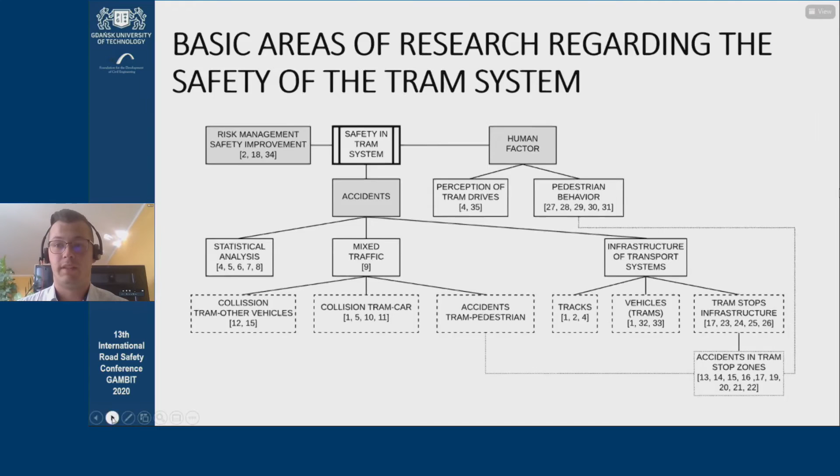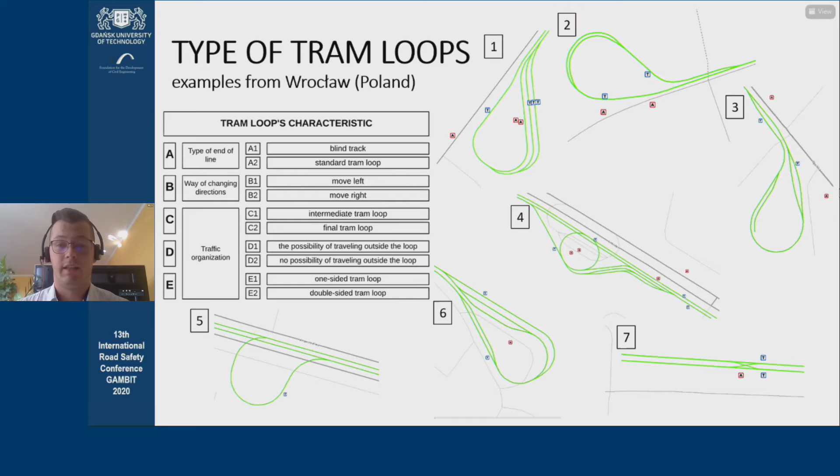The joint operation is possible on loop number 4. And the last division is, this is again about indirect loops. It's possible to access them from one side, like loop number 5, or they can be accessed from both sides. That's loop 4.

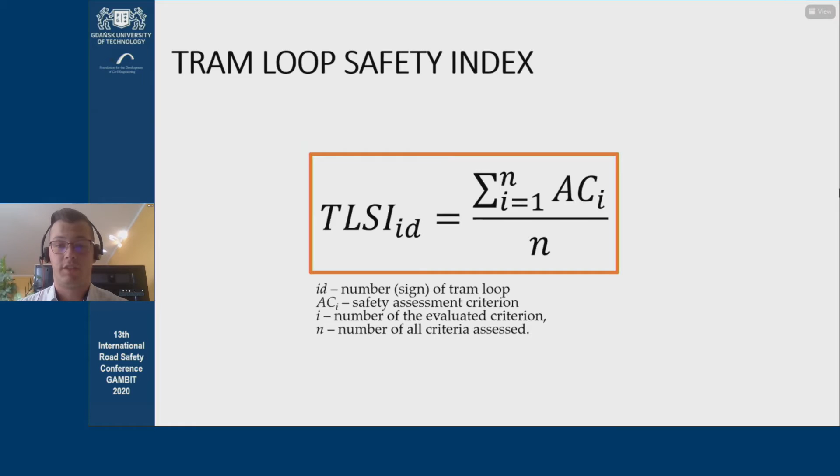Further, I'd like to talk about the safety ratio which we've developed. We call it TLSI. It's Tram Loop Safety Index. And this consists of the assessment of the various criteria, and there are 5 of them. I'll give the criteria in greater detail a little later. The ratio is actually the arithmetic mean of the 5 criteria. And here they are.

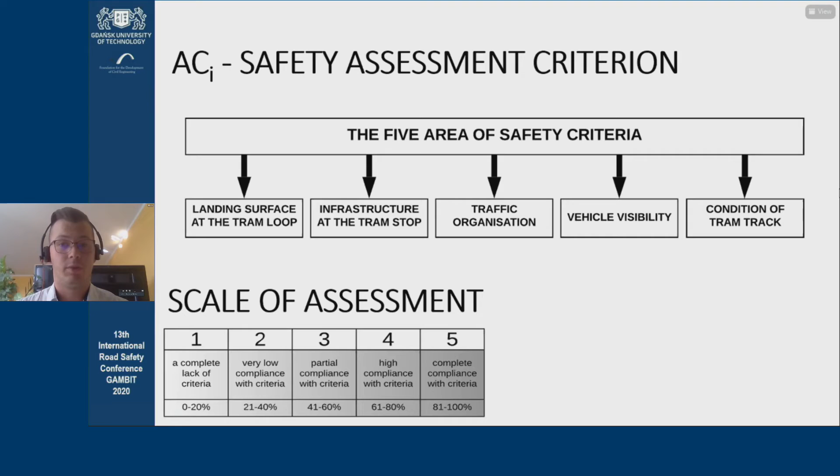Then the value is translated into a point value. Based on the point value, we can calculate the TLSI indicator, the safety index. And for an index calculated in that way, we are then able to give priorities and recommendations for a given loop. Thanks to those recommendations, given certain priorities for the necessary safety measures, we can, at the end of the day, improve the level of safety of the users of the given loop.

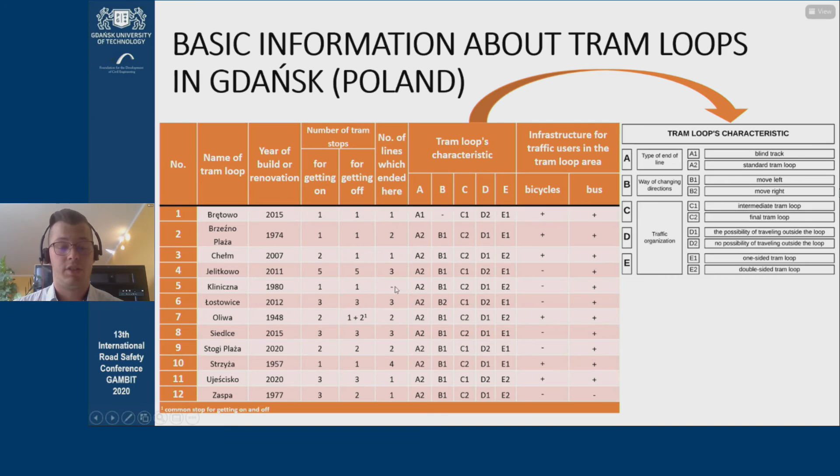and basic information about the loop's characteristics on the basis of the individual division and the relation of the loop to the tram line, and also the ability to provide service in the area of the loop to either bus transport or to connect to bicycle infrastructure.

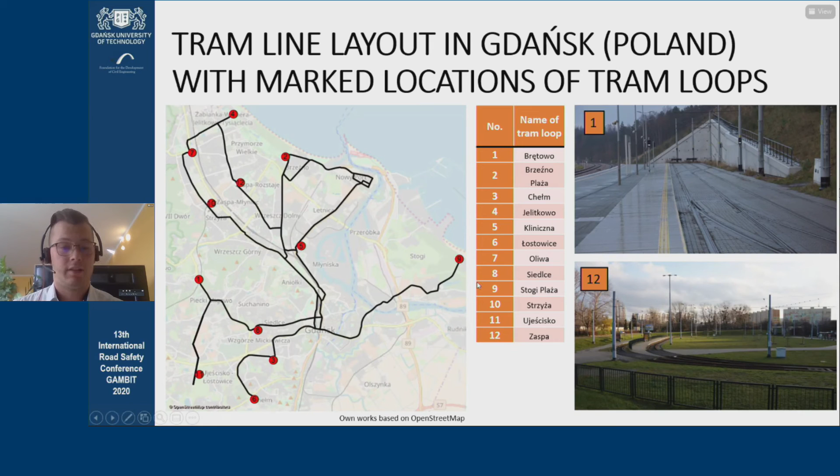This is actually the end track where trams end their route, but they can turn back switching tracks. And number 12 is Zaspa loop, where trams turn around in the traditional way.

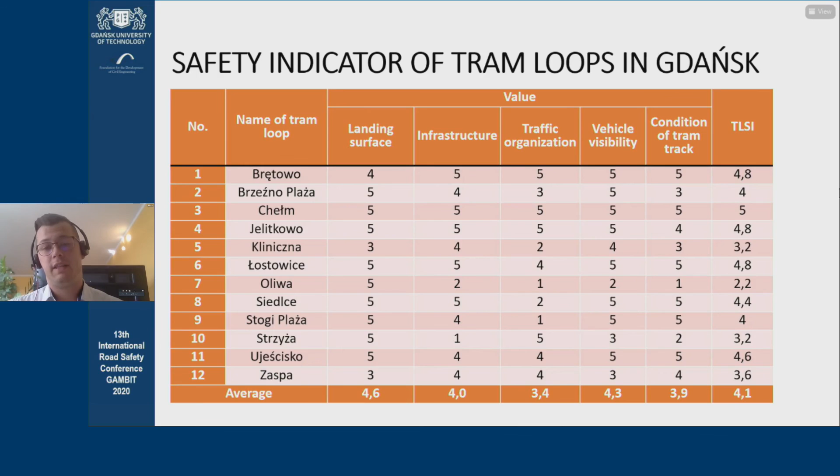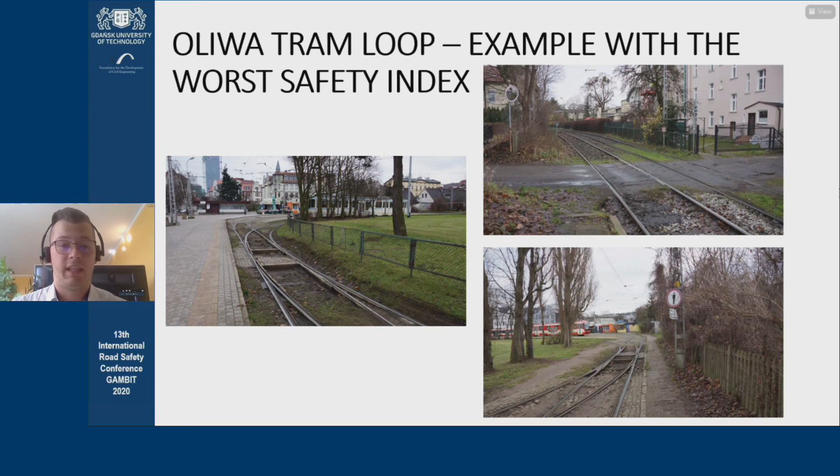Partially there is no fencing. There are different levels of the platforms, and there's insufficient lighting, something that was talked about so widely during this conference. In terms of visibility, there's also an area where we could indicate elements of infrastructure and greenery that pose an obstacle to visibility. Also, we could note the low technical condition of the track.

Moving on to the conclusions. As I said in the beginning, the literature overview indicates that there is a research gap in terms of tram loops. The proposed method for assessing the safety of tram loops provides the possibility to carry out a multi-criteria analysis that could be used for reporting, monitoring, but also to make recommendations about which elements need to be improved or repaired on the various loops.

In the course of the research, we made recommendations for each of the loops in Gdańsk. As I said earlier, the lowest value was the organization of traffic on the loop, 3.4 overall for Gdańsk. It may, but does not have to, indicate that this is an area one should focus on in other areas of the tram system in the city of Gdańsk.